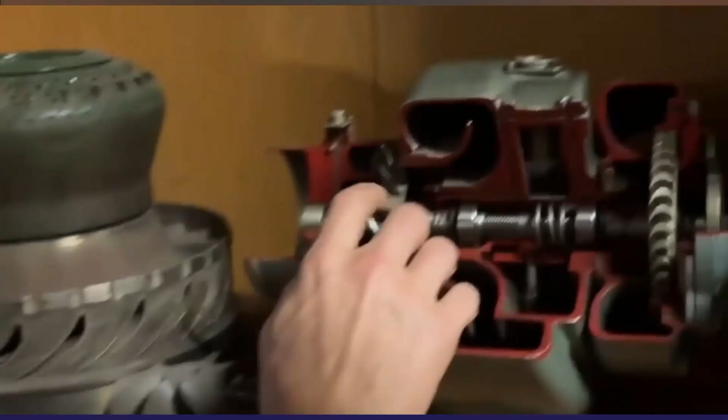Well, on the whole, yes, you are absolutely right. At the Gorky automobile plant, the chief designer under whose leadership the gas turbine engines were created was my father, Veniamin Matveyevich Kostyukov. By the will of fate, I picked up the banner in particular. Despite the collapse of research work in the Soviet Union, the results of that work, the drawings, the studies, the research findings, the reports, the gas turbine engine samples themselves, all of it we managed to transfer to Moscow Polytechnic University, to the Department of Transport and Gas Turbine Engines, which I became head of after some time.

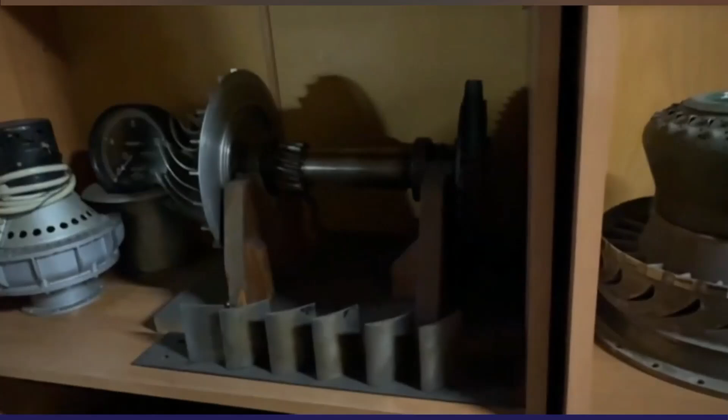After that, together with the department, we tried with all our strength to preserve and develop this field. And in fact, on the whole, it worked out.

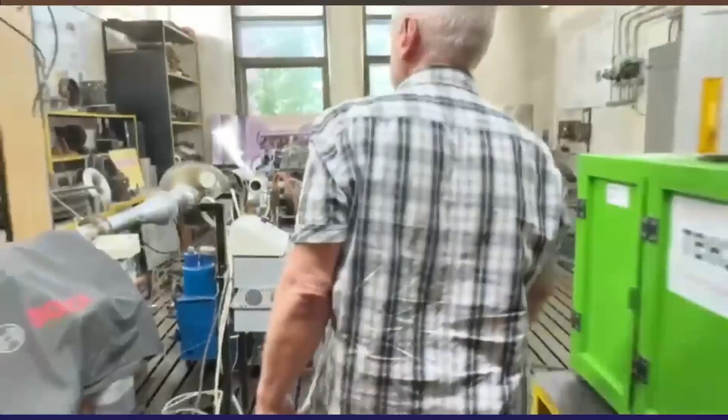Somewhere around the early 2000s, the Salyut plant began to take an interest in our engines. A division of the Salyut aviation plant was set up at the department to begin work on a deep modernization of the Gorky automobile plant gas turbine engines. This essentially supported the department, made it possible to continue the work, and most importantly, to pass on the knowledge of designing gas turbine engines to a very large number of students.

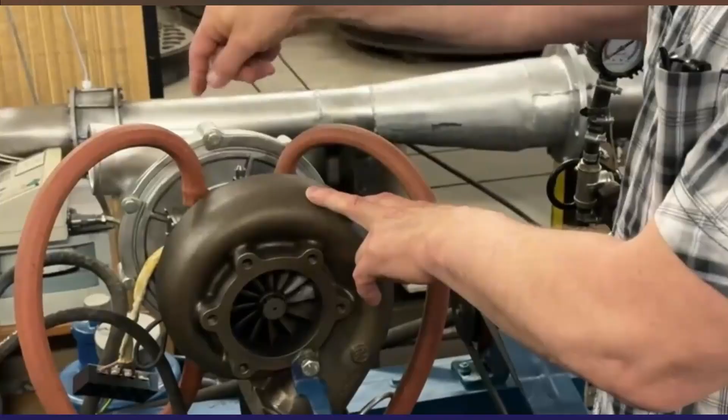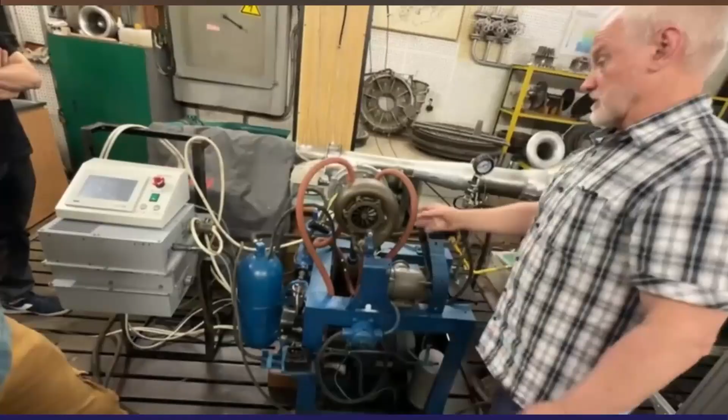In particular, as of today, the gas turbine unit, or microturbine unit, being designed at AERONOVA is essentially designed in part by graduates of the Department of Transport and Gas Turbine Engines.

One would think the unit is fairly complex, and that some large design bureau ought to be working on it. But right now you have around 10 people on your team. I'd like to ask, how have modern design methods helped to simplify or speed all this up?

A very good question. Without a doubt, modern design methods has a very strong influence on the speed of design. But beyond that, the design speed of the gas turbine engine at AERONOVA was influenced, apart from modern technologies, precisely by the developments that preceded the work at AERONOVA, namely the joint work with the Gorky automobile plant and the work carried out at the department. Essentially, the department worked for a fairly long time precisely on a gas turbine engine of this size class, on the order of 300 kilowatts.

Without a doubt, high technology, and above all computational technology, is used nowadays for anything—any flow, any combustion that takes place in the bladed machine spinning at enormous speed, in the combustion chamber where flow, combustion, mixing and admixing occur, in the recuperator where the most complex thermal hydraulic processes occur, where heat is transferred from the exhaust gases to the compressed air in the gas turbine. Today all of this is already computed using existing simulation software, and very accurately at that—not with 100% precision, but at least 90% can be reliably calculated, depending on the task and its complexity.

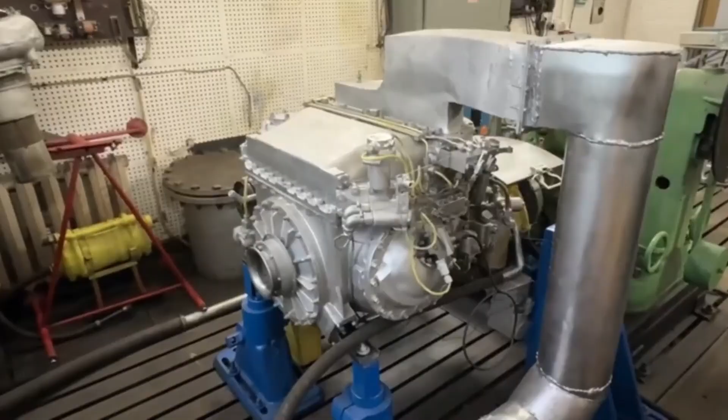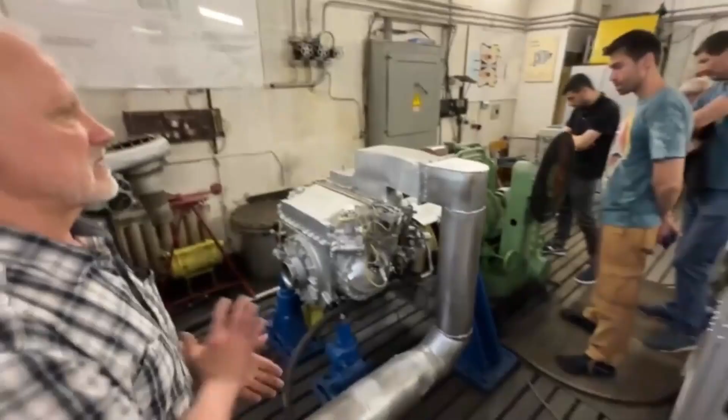It turns out to be quite a significant market. But besides that, the gas turbine is appealing thanks to its well-known multi-fuel capability. It easily runs on practically anything that burns: gas, alcohols, petroleum fuel, kerosene, gasoline, diesel fuel. It can run on heavy fuel oil as well, but here there are certain complications—it will not operate efficiently. You need to lower the maximum temperature, otherwise the gas turbine blades will quickly deteriorate and corrode.

Environmental requirements—as I understand it, today's environmental requirements for exhaust emissions also, at the very least, favor the microturbine. Exactly, that's right, yes, without a doubt.

Today, as is well known, these processes had been going on since somewhere around the 1980s and even a little earlier. Environmental performance was a banner and a requirement, a direction along which power units were being developed—essentially a banner of requirements demanding lower toxicity and lower harmful emissions.

Today, as is well known, these requirements reach incredible levels and demand not just the absence of emissions of oxides of nitrogen and carbon, but it is also being banned, or at least measures are moving in that direction, to fully prohibit emissions not only of carbon oxides but also of carbon dioxide. The request is for power units that emit no carbon at all, which, as we know, is tied to the climate.

Because the combustion temperature differs from that of internal combustion engines, in a microturbine it is possible to create conditions in which these harmful oxides do not form at all. The gas turbine is good because harmful emissions can be reduced without any additional devices of the kind installed at the exhaust of familiar gasoline and diesel internal combustion engines. In a gas turbine, you need none of this—additional devices are not needed.

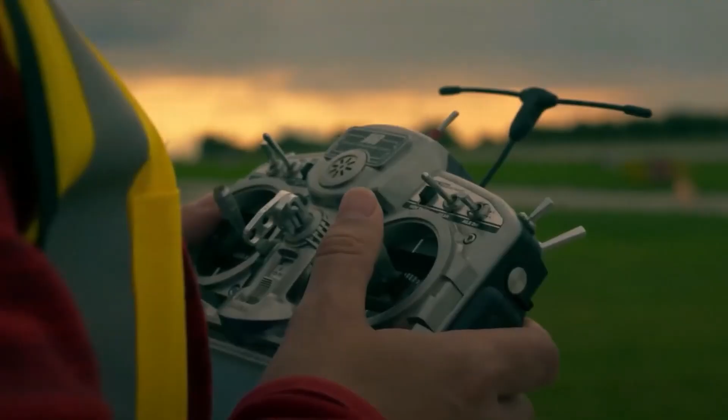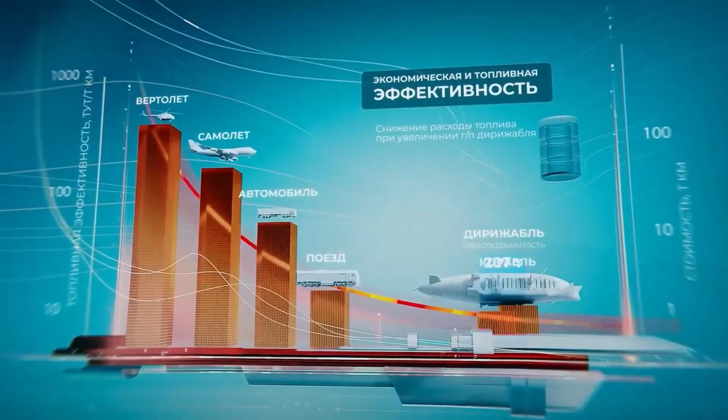AERONOVA is developing a full lineup of aircraft across multiple classes, from lightweight unmanned platforms to heavy airships designed for complex logistics operations, showcasing their capabilities and effectiveness in the modern world.

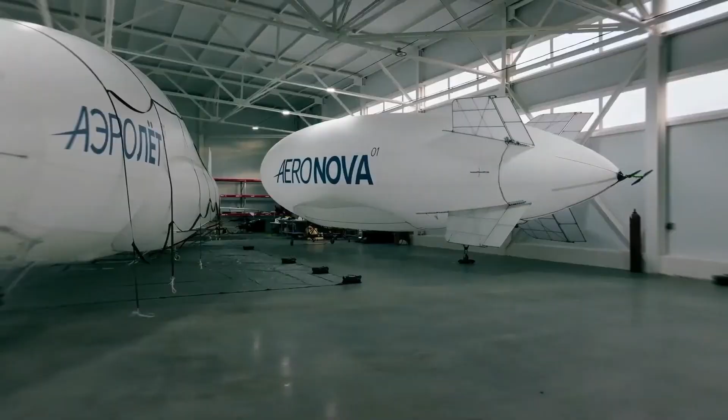The aircraft lineup will include several prototypes, among them the Nova 01 and the Aerolet 01. These aircraft were built specifically to test and put into practice all the modern solutions that the company plans to implement across its future production models.

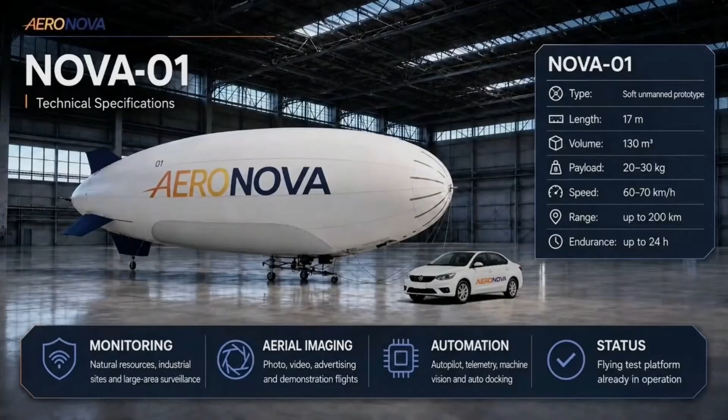It is my pleasure to introduce our first aircraft, the Nova 01 Airship. It is essentially a dynamically scaled copy of our next model, the Nova 2. We use it to refine and test flight control systems, autopilot functionality, and data collection processes. In the future, an upgraded and further developed version could become a fully standalone product, whether for aerial monitoring missions or advertising applications. Its envelope volume is 130 cubic meters, and its total length is 17 meters.

It is capable of carrying up to 30 kilograms of useful payload on board, whether that is specialized equipment or any other type of cargo that needs to be transported. Future modifications of this aircraft could also become a standalone commercial product, serving as an advertising platform or as a dedicated tool for monitoring and surveillance operations.

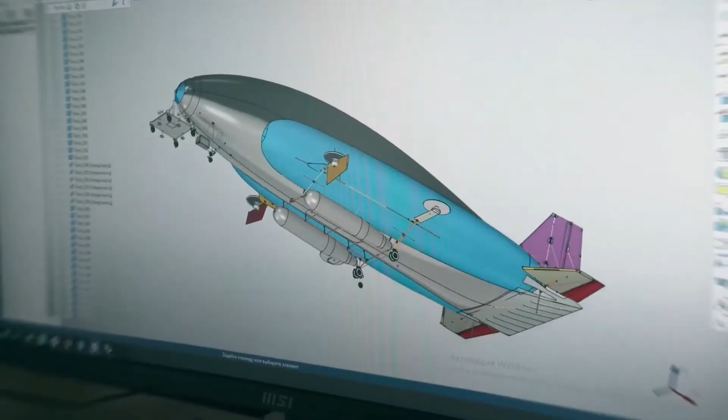Aerolet 01 is our hybrid version featuring enhanced aerodynamic characteristics. It is an experimental model on which we are also testing new solutions that are unconventional even for next-generation airships, solutions that may well be applied in our upcoming models. In addition to aerostatic lift, this craft also uses aerodynamic lift, which improves its performance across a range of specific tasks and missions where airships can be effectively deployed.

Its envelope volume is approximately 190 cubic meters, its total length is 19 meters, and the maximum payload capacity it can carry on board is around 50 kilograms.

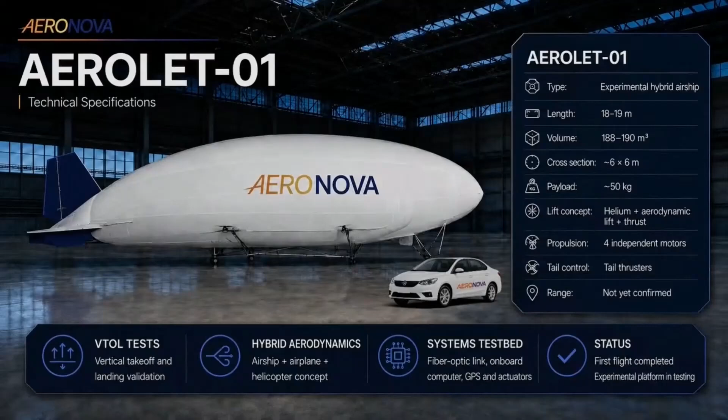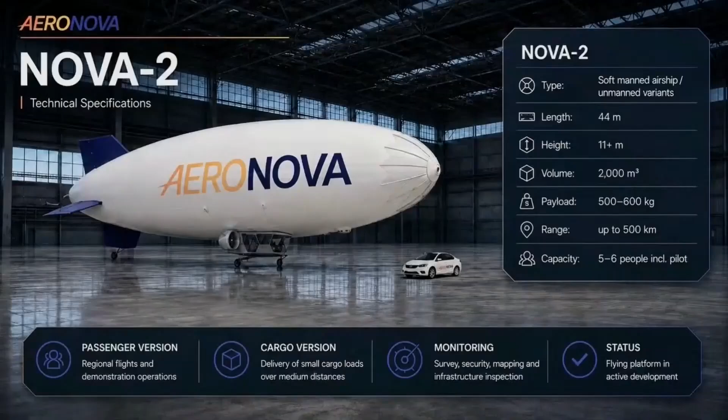The lineup also includes the Nova 2 Airship, a craft with an envelope volume of 2,000 cubic meters, capable of carrying 500 kilograms over a range of 500 kilometers. Its passenger version will be designed to accommodate 6 people, including the pilot.

Next in the lineup is the Nova 8 Airship with an envelope volume of 8,000 cubic meters. This aircraft will be capable of transporting 19 passengers or up to 4 metric tons of cargo across a range of 3,000 kilometers. Rounding out the lineup is the Nova 35 Airship, a craft of an entirely different class, featuring a rigid hull structure.

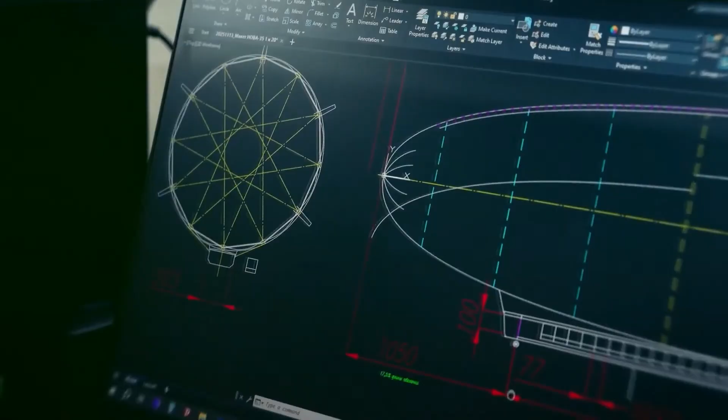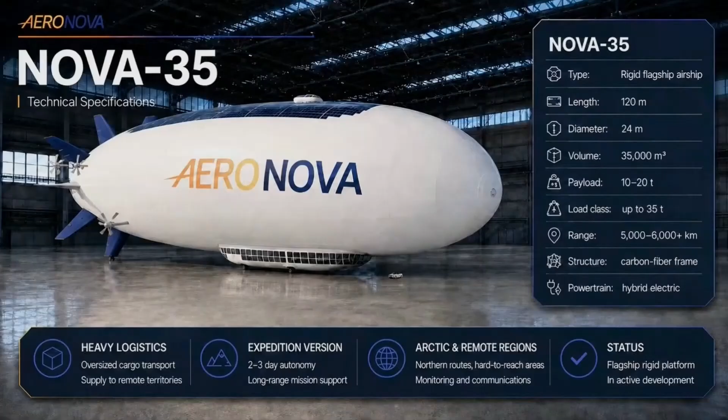It will be the very first and smallest rigid hull aircraft that the company is planning to produce and bring to market in the future. This aircraft will be capable of lifting a minimum of 15 metric tons and transporting cargo over thousands of kilometers.

The full lineup is designed to address a very large share of the demand that has emerged in today's logistics and freight transportation market.

Our next step is the Nova 2 Airship, which is capable of carrying 6 passengers or 500 kilograms of cargo over a distance of 500 kilometers.